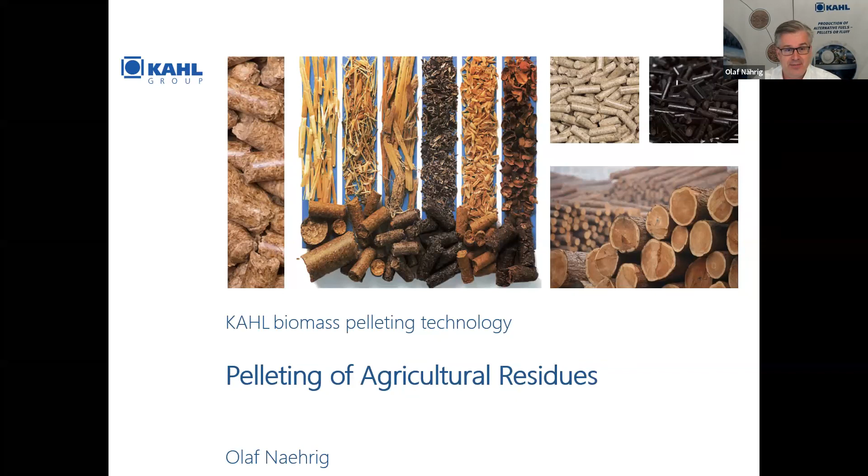For example, here in Europe, the straws from wheat or corn, maize straw, and other straws, even grasses. And when we go further, we can also see that for many decades, beet pulp, for example, has been pelletized. But this is now more an animal feed topic. Let's talk about pelleting of agricultural residues more on the energy sector.

You may know Amandus Kahl is an independent family-owned company. We call ourselves still a medium-sized company. We have more than 900 employees worldwide. And we are also a member here in the World Bioenergy Association, and a very proud member. We appreciate all the work of this association, especially as it brings the topics that we have as a supplier together with the other parties in the industry on the table.

It's very interesting. Amandus Kahl is a company made in Germany, and it's everything from a single source. We can build complete plants, with engineering, manufacturing of equipment here in our facilities in Germany. Then we have erection, assembly supervision, startup and commissioning, and also after-sales service, all done with our own people from Reinbek in Germany.

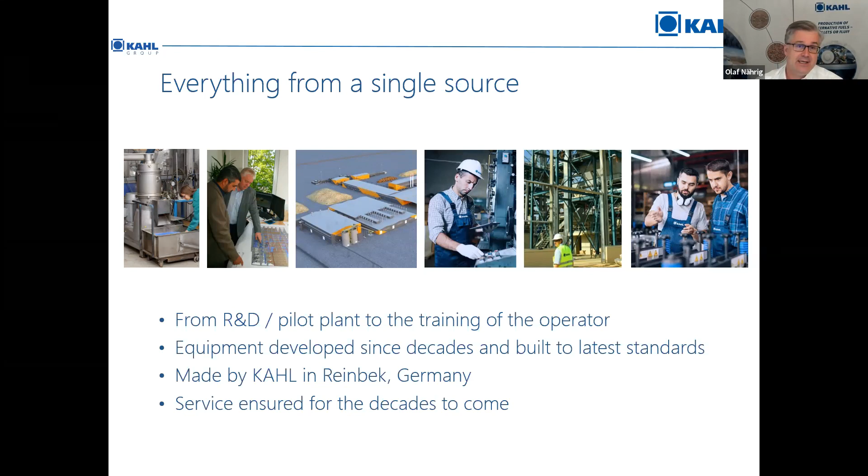You may know that we are basically the sole maker of real industrial flat die pellet mills. Our industry flagship today in the biomass industry is our 65-1500 with 630 kW. On wood and other biomass, it already has a basic capacity of 10 to 12 tons per hour. And today we also see more and more people adding steam, which makes this pellet mill even more efficient, with capacity up to 15 tons.

For example, this is done in North American wood pellet plants where we have a lot of large-scale installations now, where people achieve 15 tons with a single pellet mill, applying only 630 kW — a very energy-efficient machine. Nevertheless, at this efficiency, it still provides the highest PDI and bulk densities, to supply pellets according to industry standards. And it has the lowest energy consumption and operating costs of all pellet mills in the industry today, when it comes to roller lifetime, bearing lifetime, grease consumption, energy consumption, and downtimes — in the end, available operating hours — it's a very feasible pellet press.

And these advantages we can see clearly in the rising market share of this pellet mill in the global pelleting markets.

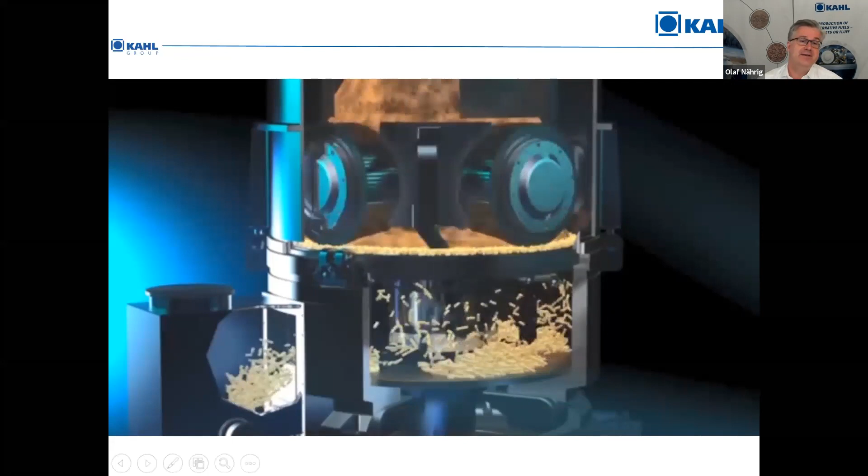Now, how does the flat die pellet mill work? The material comes from the top and falls into the large press chamber where the rollers are rotating on the die plate — a multi-roller system — and these rollers press the material through the die plate and shape the pellets. Roller numbers are typically 3 to 6; in the big machines we have 6 rollers, which are large and have large roller bearings inside. This is important for the long lifetime of the roller bearings and very low grease consumption. The big press chamber provides sufficient space for the material to fall in, be distributed, and be pelletized, which is very important for the low bulk density fiber we usually have in agricultural residue.

So now comparing wood and agriculture residues, I selected these two photos here, logs and chips, and we can see that it looks like a very regular product. The logs are nice and neatly stored here, and the wood chips also have a good shape.

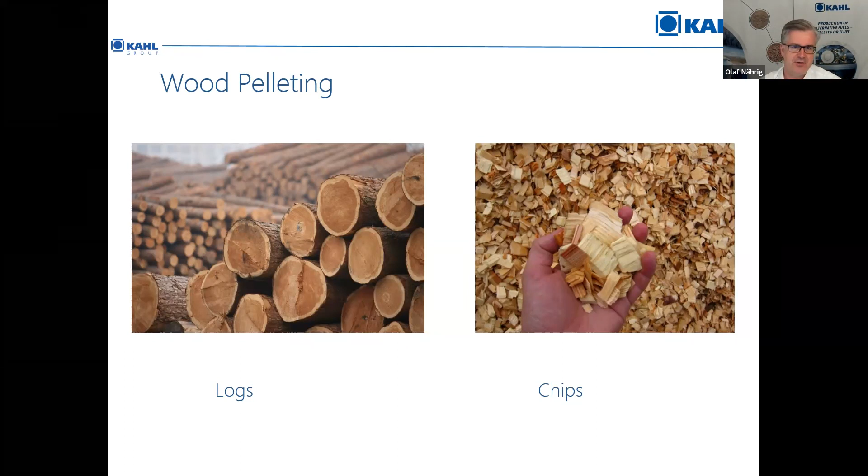So it can be also sawdust in the wood pelleting, because many wood pellet plants are attached to a sawmill. But these are monoproducts typically in large amounts. So a wood pelleting plant has different requirements when it comes to, for example, the intake section, and this has to be considered when we now have an agriculture residue pelleting plant, where the raw material looks different.

So, but what do we have? Mr. Rakosh mentioned already earlier, no? We also have high ash contents in these agriculture residues, so we have to do something against wear and tear to have long, stable production runs with the pellet mills. We have high contents of undesired minerals and chemicals, which is not desired by somebody who wants to burn it. So typically we have lower calorific values.

Then we have to consider seasonal availabilities. When you have bagasse or other plants or straws, they come in a certain season of the year. Then we have to see what to do with the storage of this material in the meantime, and to prevent some fermentation processes. Typically, these are challenging raw material properties.

We have to question the homogeneity of the material. Compared to sawdust, one can assume that, for example, agricultural residues don't have this homogeneity. They may differ. Then, as I mentioned, fermentation processes can occur while wet, something starts to rot maybe. And in agricultural residue, also contamination during the collection process with soil, sand, whatever, can go into this material, and this has to be considered. And then we have the low bulk densities and usually also more poor flow abilities.

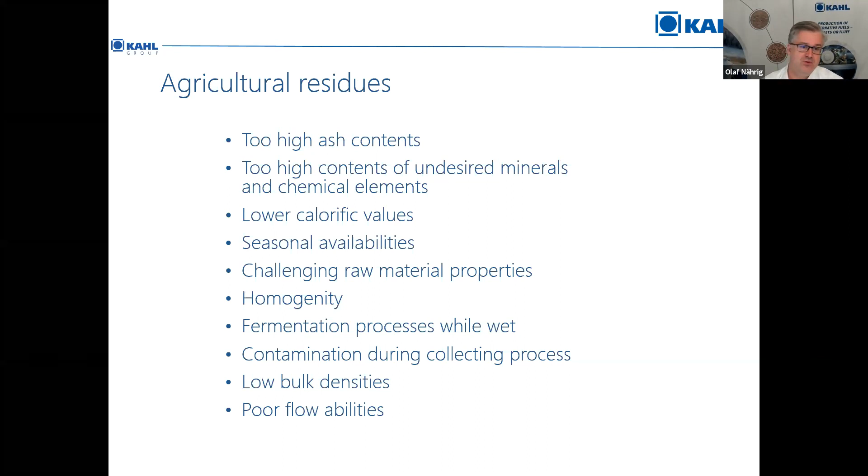So as mentioned, my background is Asia Pacific. That has brought me to many biomasses to be pelletized, which are maybe for Europeans a little bit odd, but in Asia Pacific very common.

Oil palm fronds, we started already in the 1990s. Each year, the lowest row of branches is cut, and then something can be done. One thing is really to pelletize it and make it as a fuel or as an animal feed.

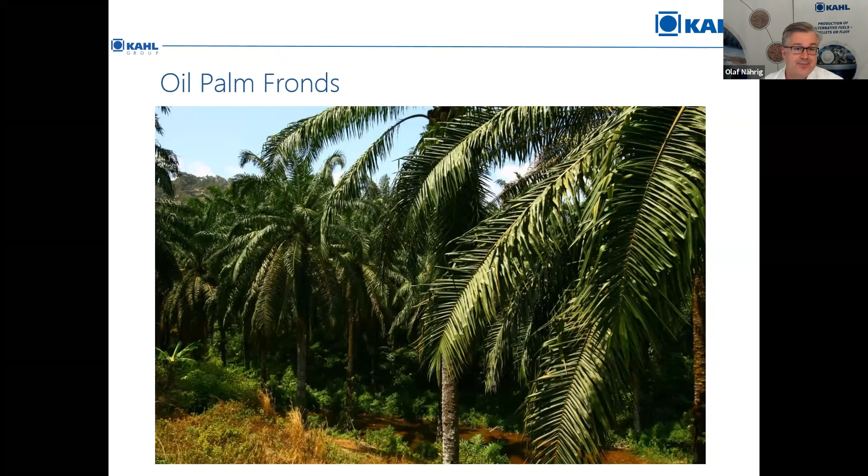Or empty fruit bunches from oil palm. Each oil mill has this kind of dump where they put the empty fruit bunches and store them. So here they still look somehow neat, but when you get closer, you will see it's a very fibrous material with different characteristics in each bunch. So we have loose fiber ends and we have a tough pinnacle in the center. That's what we have to consider when we process this.

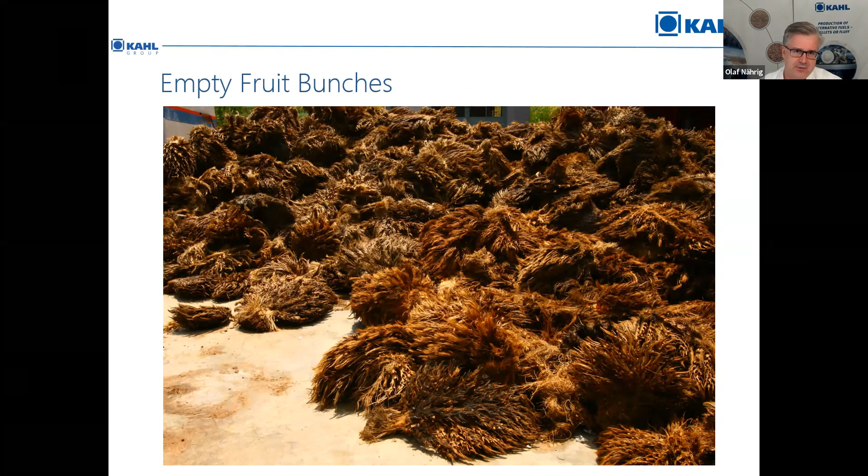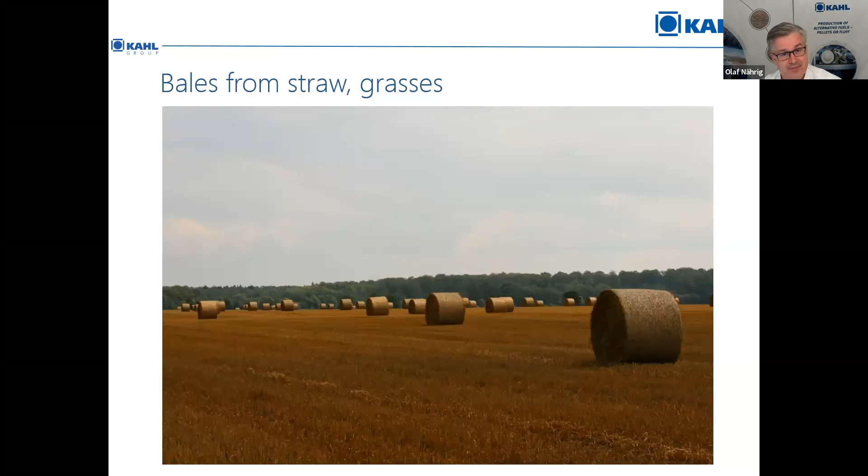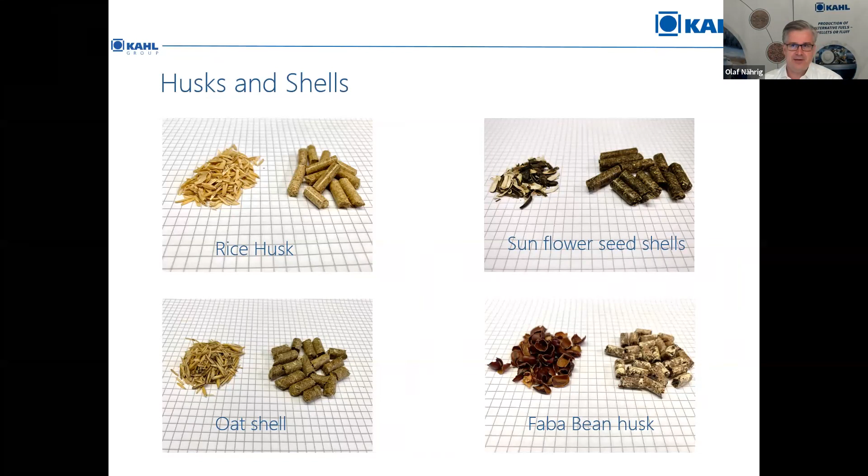And then we have the husk and shell fractions. We have rice husk, sunflower seed shells, oat shells, faba bean husk, could be all these kinds here. And when we have these as a raw material, they are already good, usually dry, which is very good, one can save money. Then one has to consider maybe a grinding step, and then it can be pelletized. And I can tell you these materials that you can see here, with a Kahl flat die pellet mill, you can pelletize directly without any grinding step before pelleting.

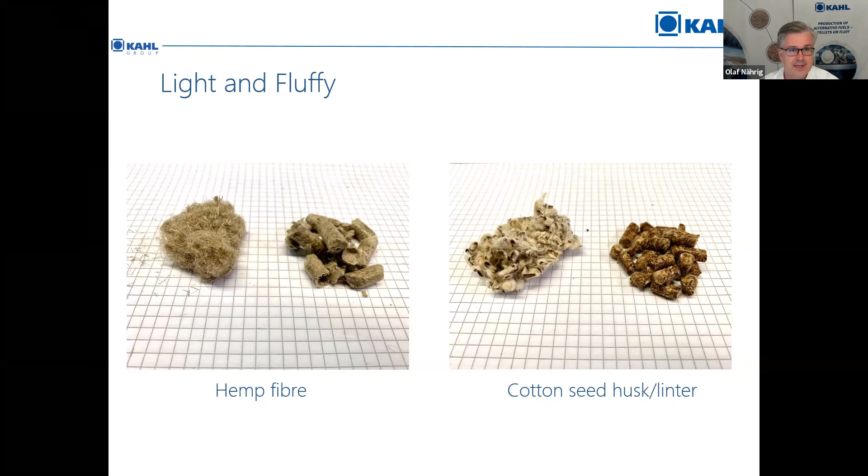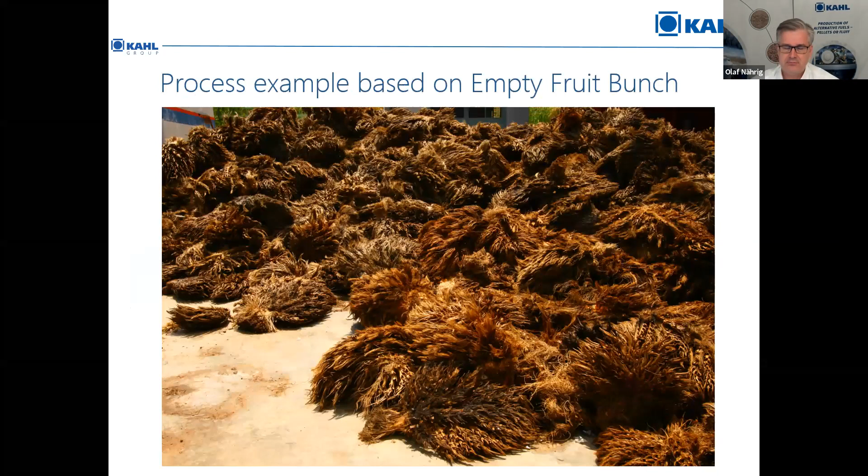I'd like to give you now an example on the processing of empty fruit bunches, how this can be done. This concept is one we already use in Malaysia and several plants.

So for the empty fruit bunches, there's a wet shredding process before, and these long wet fibers can go into the pan grinder mill, and then we make fluffy pellets.

These fluffy pellets you can bring to the belt dryer, where we can have a very homogeneous distribution on the dryer belt, and achieve a very homogeneous drying result, which is essential for the pelleting process. We have to consider always particle size, moisture, and homogeneity of these characteristics. Homogeneous moisture content is very essential for a good pelleting result.

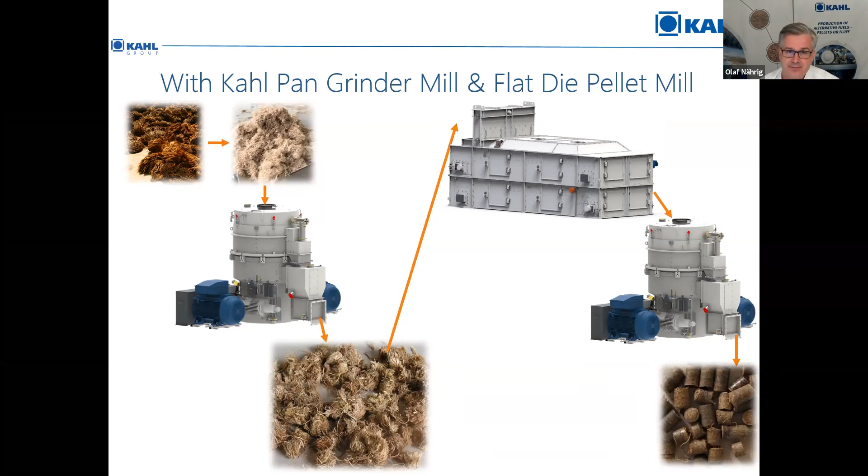Okay, summary for us here, pelleting of agricultural residues. It's a very interesting alternative fuel raw material. We know that people more and more look into these raw materials because they are cheaper. They are really also available as a fuel, and they want to do something. But we need to do an adapted process according to the raw material characteristic.

We have an adapted size reduction process. You saw the different characteristics the raw material can have. This we need to consider in a plant. We have to apply wear measures against high ash content and consider the large volume flows to be handled. And these large volume flows also need to be processed in any machine in the process.

So, and here, of course, the large scale pellet mill such as the Kahl 65-1500 and other models, they have the space to handle these materials at high capacities very well.

We have to look into the consideration of low operating expenses. That means long production runs, long lifetime of the parts used, for dies, rollers, and bearings. Low energy consumption and grease consumption, because it's an agricultural residue, so the value is not the highest. So we have to look very, very well into the feasibility of the overall process.

And what we also see now is optional value adding by washing processes, steam explosion processes, where we also supply equipment. And of course, I think everybody already knows the torrefaction processes to increase the value adding before doing the next step of pelletizing.

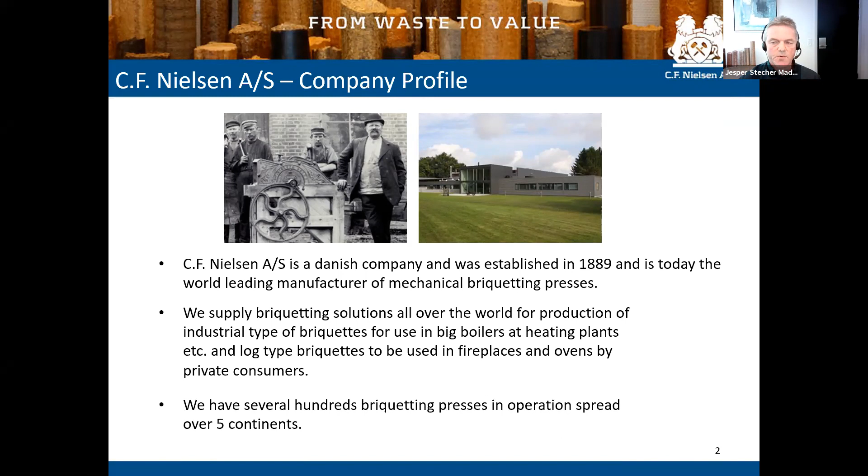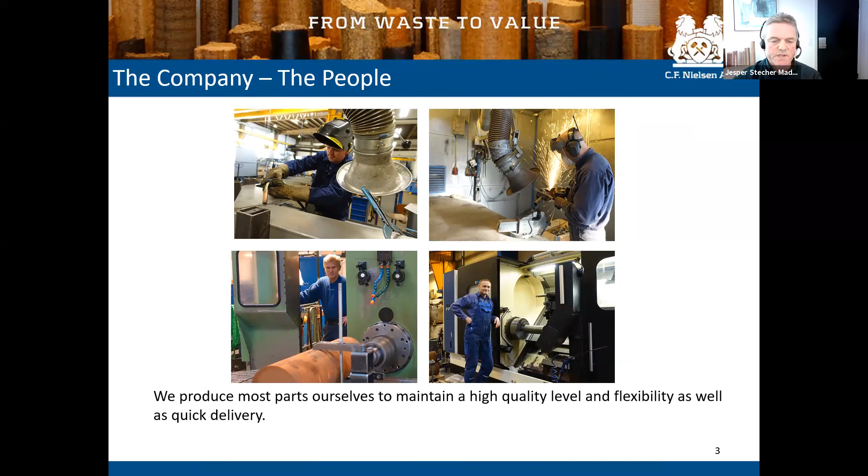We produce the most part ourselves, mainly to maintain a high quality level and also to be flexible, to be able to change things rapidly, and also to have a rather high level of quick delivery. So that's one of our key points, that the vital processes we keep in-house to be able to control them.

Another line is the Shimada, which is an extruder press, a little bit less capacity, up to 600 kilo per hour, and also makes this special briquette size and shape, I think you might know as the Shimada briquette. Very high density briquette, and very good for, for instance, pizza.

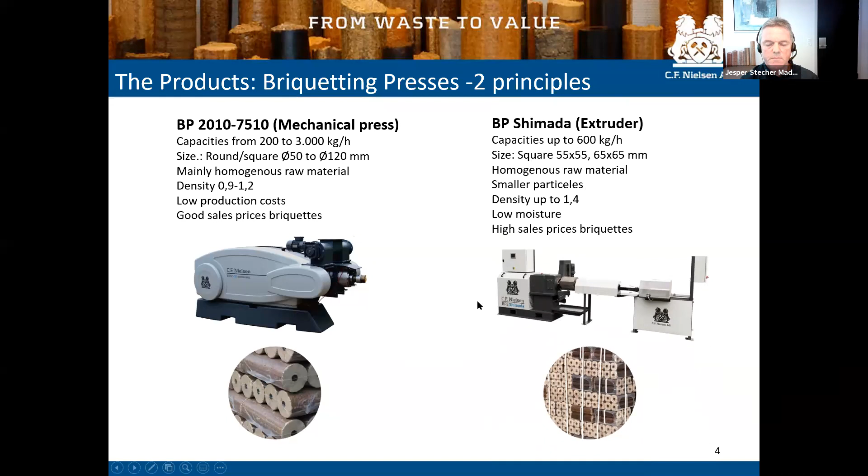If you take the main product, which is our mechanical press, the construction is equal to the construction of an eccentric press. A constantly rotating eccentric is connected to a piston, and that compresses the raw material into a conical die and makes the briquette. We have sizes from smaller ones from 150 up to 3,000 kilo per hour, and in various types of shapes and diameters.

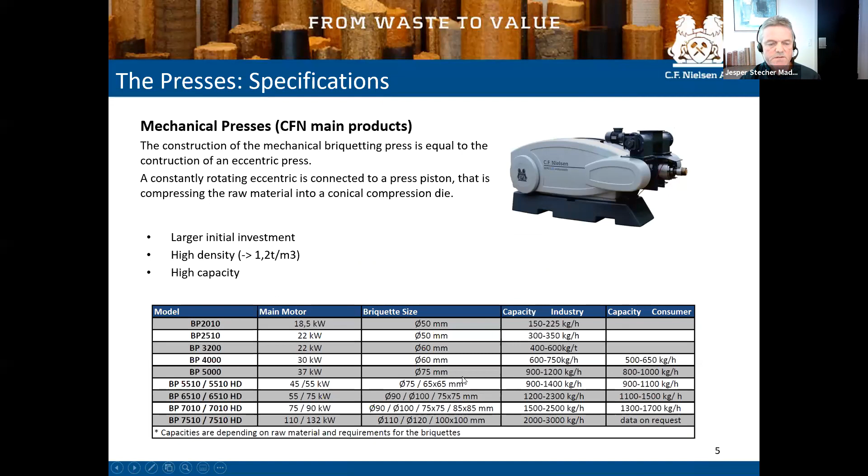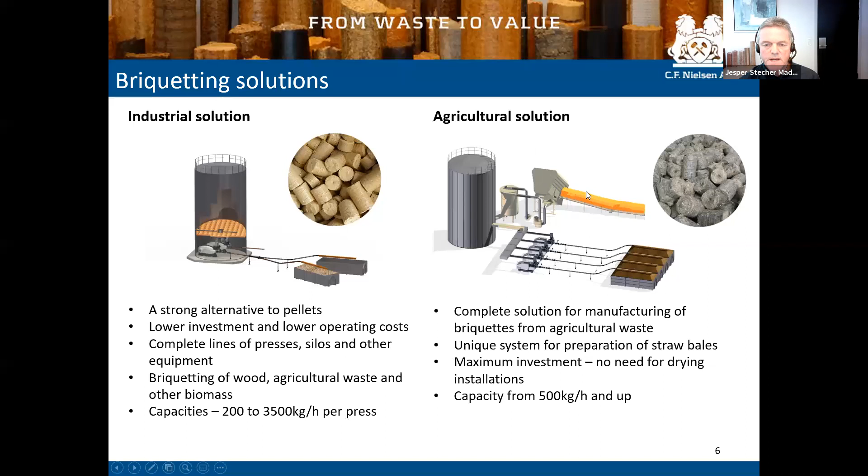We have the agriculture solution where we can make a complete solution for briquetting not any, but almost any agricultural waste, and have a capacity from about 500 kilo and up. And we have a straw baling system where we can handle straw coming into the system in bales.

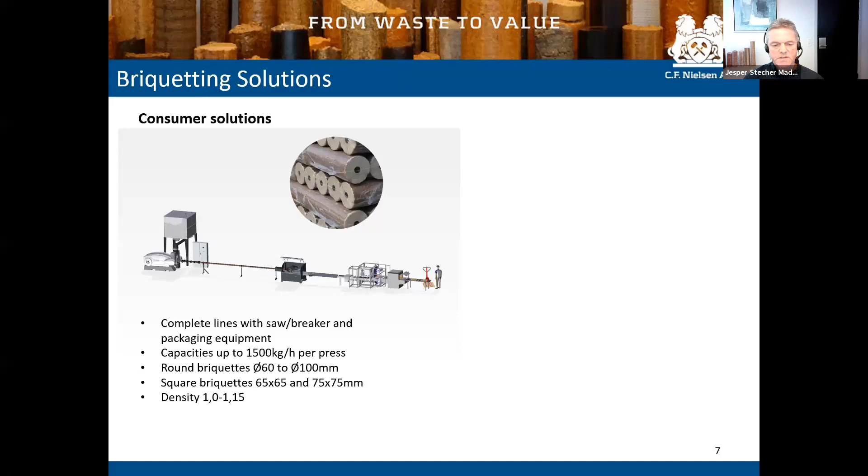Consumer solutions, which is a complete line with saw, breaker, and packaging equipment. And in the end, we could have also an automatic robot packing line. So in fact, you're going to have a pallet of 1 ton of briquettes coming out ready to ship to customers. Capacity for consumer is around 1,500 kilo per press. And again, briquettes from 60 millimeter up to 100.

We can also make a complete line making Shimada briquettes, which is, well, a little bit out of our normal league. Normally the main press we supply is the mechanical press.

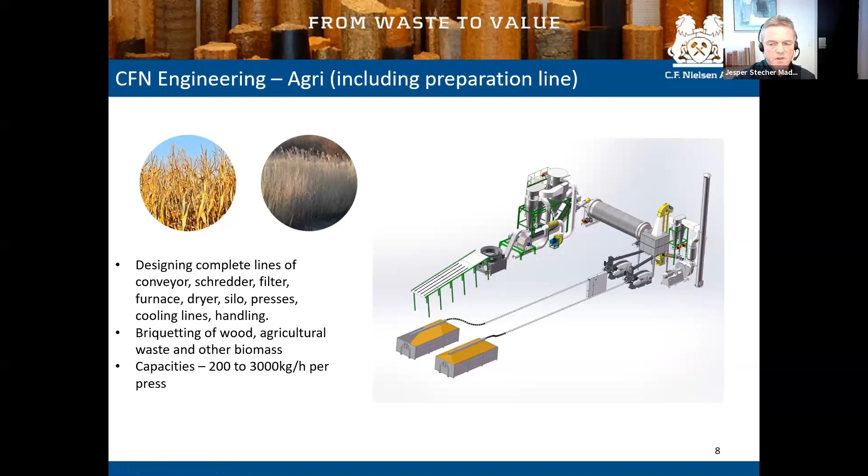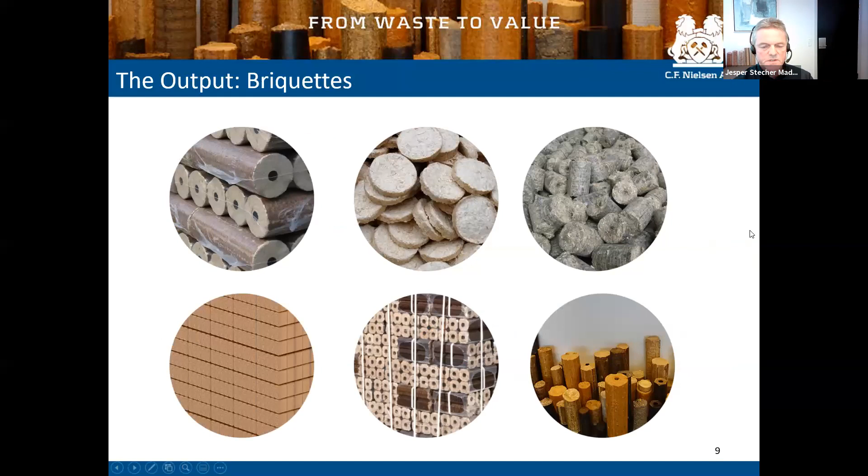We also have a division that can do total engineering, meaning that we can make complete lines of conveyor, shredder, filter, furnace, silo and presses, and then out to the end user, in this case in containers, and can briquette wood, agricultural waste, or other biomass. The output that we produce is then briquettes in different shapes, different forms, diameters. So the variation is pretty big. Sometimes it's customer specified how they would like the briquette to look.

If you come to raw material, agri, we have different types. We have peanut shells, corn stalks, rice husk, coffee husk, a lot of straw, napier grass, and miscanthus. And as the previous speaker talked about, bagasse, cotton stalks, and a lot more. We are able to more or less compress everything.

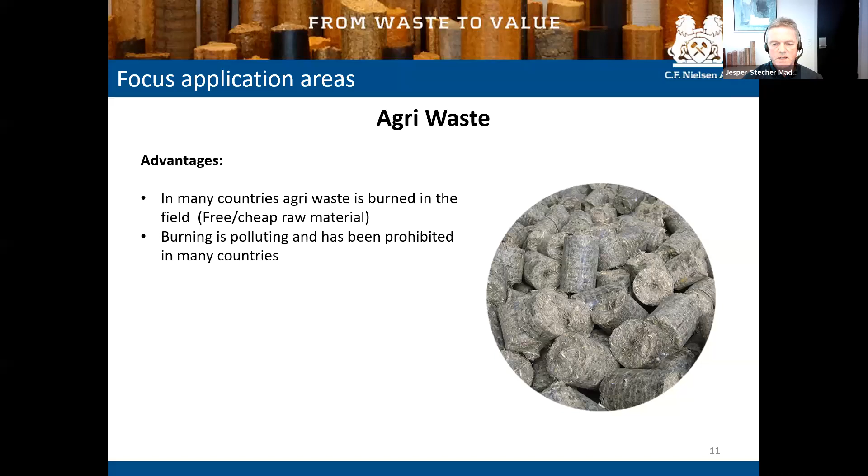The advantage of the focus area we have is on the agri waste, which in many countries is burnt in the field, which means it's going to be free, almost free, or very cheap raw material to be processed afterwards. Burning is polluting and has been prohibited in many countries, and that's why it's also going to be an aspect in the future we have to take into consideration.

Forests are being depleted, and agri waste can be turned into fuel, which is, I think, the next step in getting our CO2 step ahead, which we all are working for right now. Government incentives are available, and that would also push this in the right direction, and also to be able to supply these briquettes while getting incentives from the government.

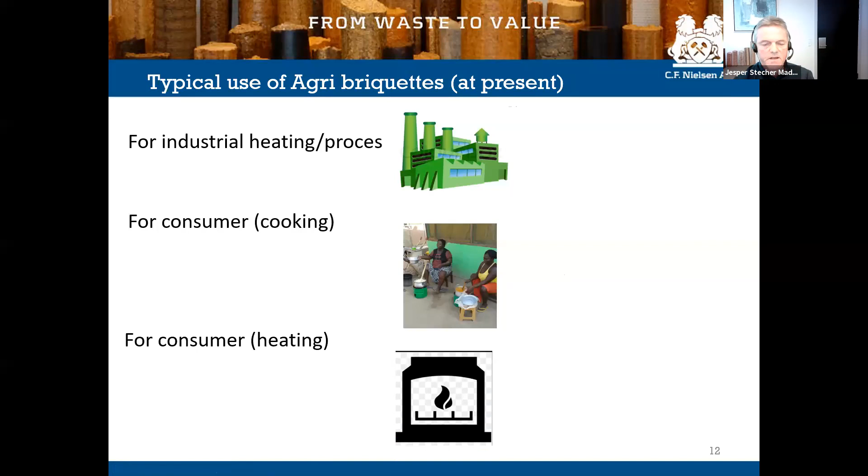What is then the typical use of agri briquettes at present? We use briquettes for heating, the process industry. Use it for consumer, for cooking. We have made several installations and several projects in Africa where they use briquettes to heat up these small stoves instead of going out and cutting some wood down. And then for consumer, the consumer heating area is also rather big.

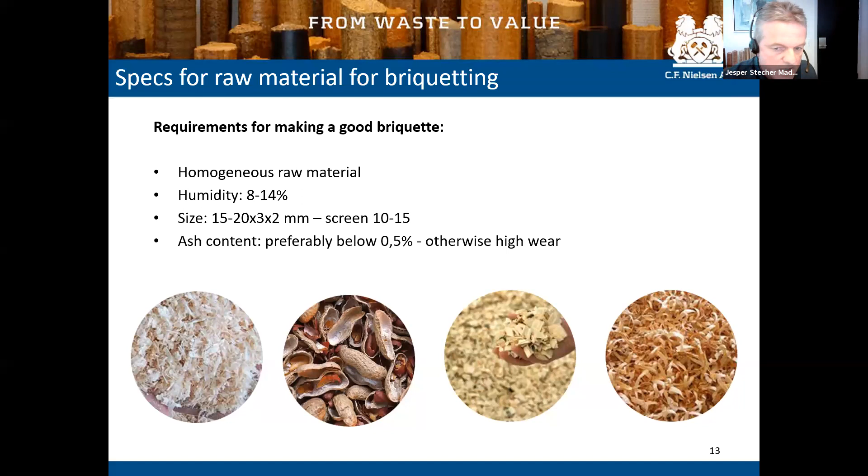But that's going to be, as Olaf said earlier, very difficult to get, because we are in this agriculture business, and more or less all of these products have a lot of ash. And that will lead to high wear on the system.

What are then the differences as we see it when we talk about agro versus wood? We have a larger volume to be densified, density typically below 100 kilo per cubic. So we have modified our inlet system to be able to cope with a larger volume in the press. The structure of agro materials requires a different die system to be able to make a solid briquette. That's why we have made a longer die system specific to have higher counter pressure in the press line and then make really solid and stable briquettes.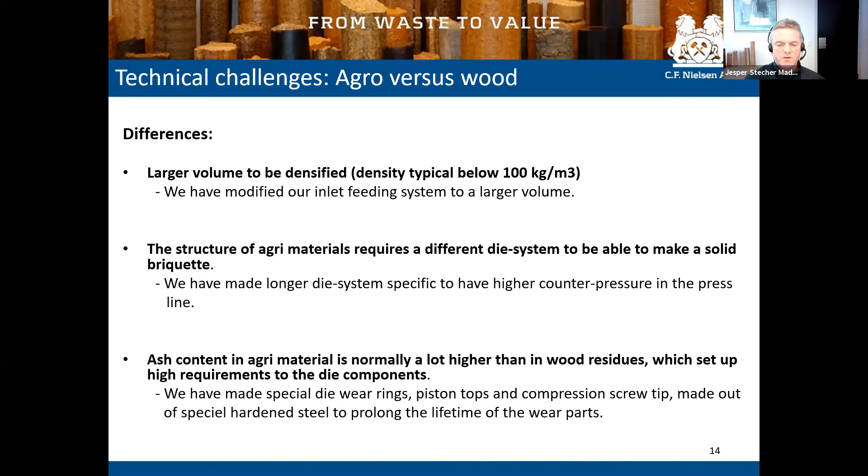And then we have the ash content in agro, which is normally a lot higher than in wood residues, which sets up high requirements to the die components. Because of that, we have made special die wear rings, piston tops, and compression screw tips made out of special hardened steel to prolong the lifetime of the wear parts, which is very important to get an operation running and also running at a reasonable cost.

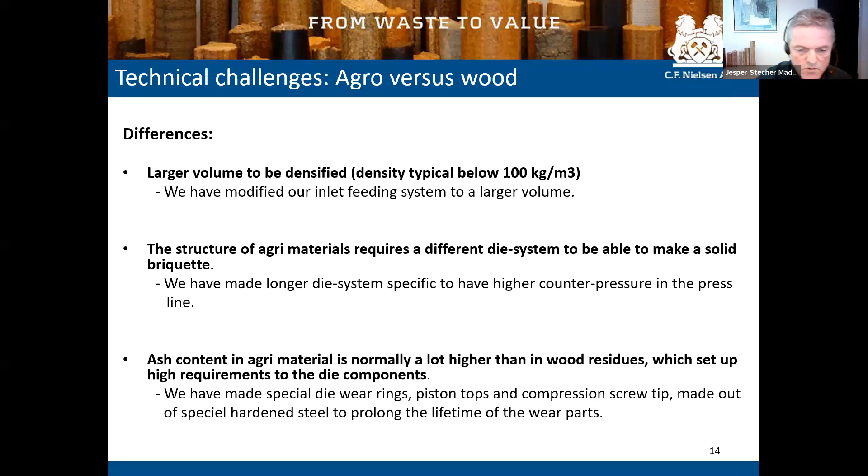Where do we then see the new market for agro waste products? We have a different sector of our company called Kinetic Biofuel involved in supplying briquettes into biogas plants. The picture you see on the left here is from an installation we have in UK. And the principle about this is that we handle straw from bales to briquette for industrial scale production based on straw and slurry. And what happens is that when we briquette straw, we make some small steam explosions, which change the structure of the straw, which will enable it to absorb more than 7 times more than normal straw. And that, of course, in the biogas plant, is very important, that the straw is able to absorb as much liquid as possible.

And secondly, of course, the briquettes give a logistical advantage when you go from loose straw down to solid briquettes. If you put straw briquettes into a biogas plant, you are able to double your biogas production with a yield of 300 liters of methane per ton VS, corresponding to approximately 250 liters of methane per ton straw. And that's a very important issue when we talk about getting a biogas plant to operate in a reasonable way and giving a good output.

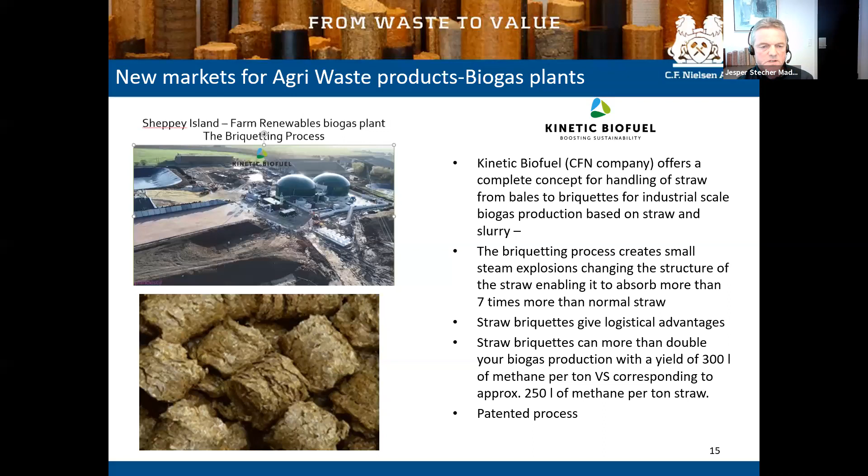Another, which might be something that we see coming in the future, is the briquetting of wine stalks, going to consumer or industrial use. If you take a vineyard like this one, we have approximately 1 to 1.2 kilo wine stalks per year cut out of each of these wine plants. That equals about 3 tons per hectare. And if you consider the total area worldwide of vineyards, the amount is very, very large. And you're not anymore allowed to burn this on the field, which they have done for many, many years. Now they have to collect it, which you can see in the center, and then they have to do something with it, which could be to shred it and to make briquettes, and then use it for industrial, or also use it for consumers. Especially in South Europe, we see this as a huge potential.

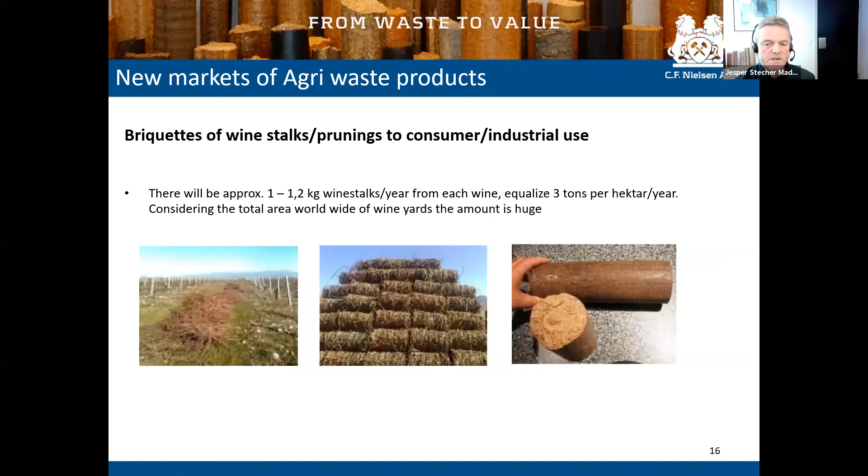So bagasse in Africa anyway is a huge potential for us to work with, and to set up the correct plant is another issue, which is in Africa in general a little bit problematic. Financially, it's not easy to raise capital, and also to work in these areas could be, to some extent anyway, problematic.

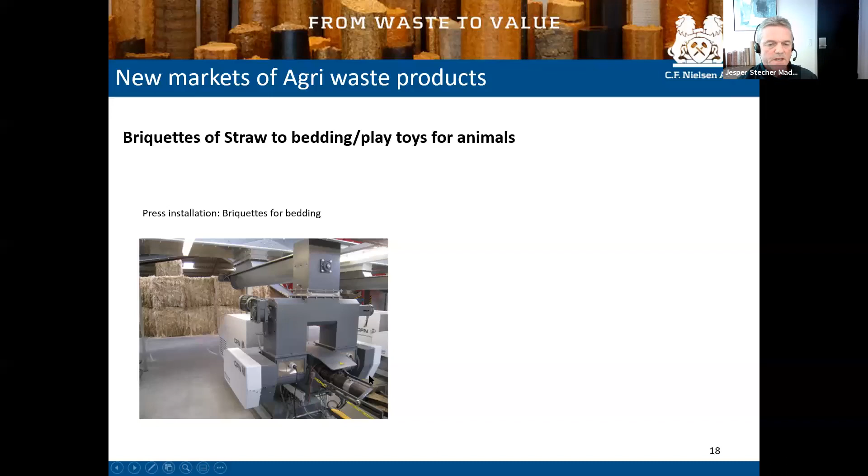Then I just took a couple of other markets for agri waste which are not into heating or energy. The first one is briquettes for bedding. You see the bales here, and we briquette it into briquettes that could be used for bedding for animals, for pigs or for cows or for horses.

Another maybe strange use of briquettes is for pigs, where they compress raw material and use it in this holder, and the pigs can go and eat it. You can add different types of minerals or whatever you like to this briquette. So at the same time as they eat it, the pigs also get small pieces they can play with, which is in fact a regulation now coming in Europe, that you need to amuse the pigs so they don't attack each other.

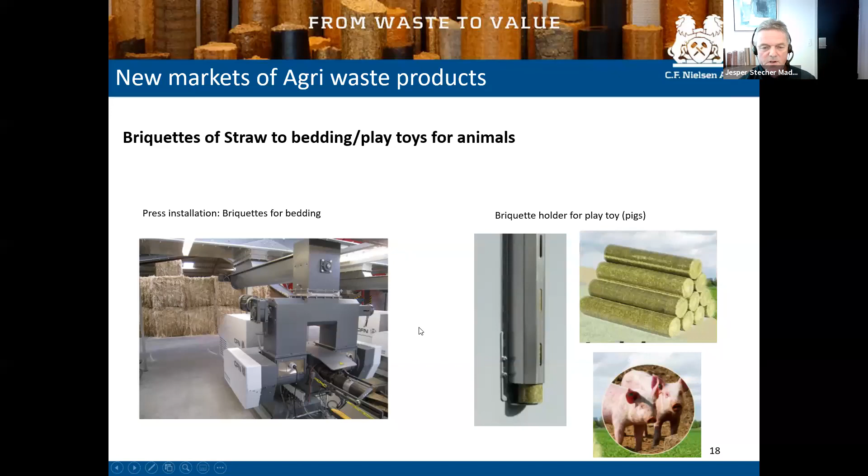The gasification area also seems to be moving rather quickly. We're not into a lot of projects like this so far, but the future looks promising, and we think that's going to be something we have to look into also in the future.

As the other speaker mentioned, to be able to make some kind of OPEX calculation of whether it makes sense to invest in a briquetting plant or not, it's very much depending on the raw material, the local cost of raw material, the sizes, the working cost, the electrical cost. So there's a lot of parameters that makes it very difficult to come up with some kind of rule of thumb for the cost of implementing a factory in a given region.

Okay, that was my short presentation. If you look at our website, you can see several videos of customer installations and a lot of information about C.F. Nielsen in general. So thank you for listening, and I hope you have some questions which I might be able to answer.

Thank you very much, that was extremely interesting, Jesper, and quite impressive how long your company has already been engaged in producing these presses. I would like to ask you a question of orientation.

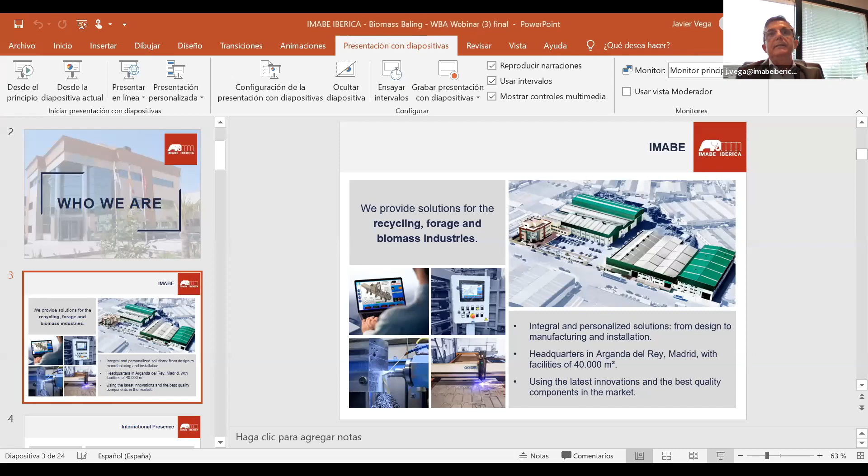I will start presenting briefly our company. We are a Spanish company based in Madrid, and we provide baling solutions for different industries: biomass, recycling, waste, and even metals.

We have our own factory in Madrid, as you can see, using all kinds of technologies. We manufacture the balers by ourselves, cutting, designing, installing all elements of our balers, and we try to use the best technology, the best innovations, the best hydraulics. We are selling quality, you know.

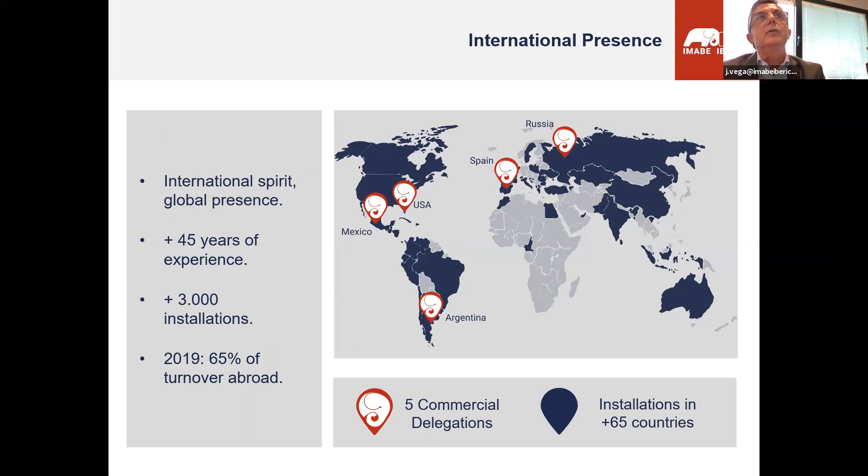We are very international, with more than 3,000 installations around the world, especially in third countries like Russia, Kazakhstan, Mexico, South America, even Indonesia, and other countries, with our own offices in USA, Mexico, Argentina, and so on. We export more than 65% of our machinery.

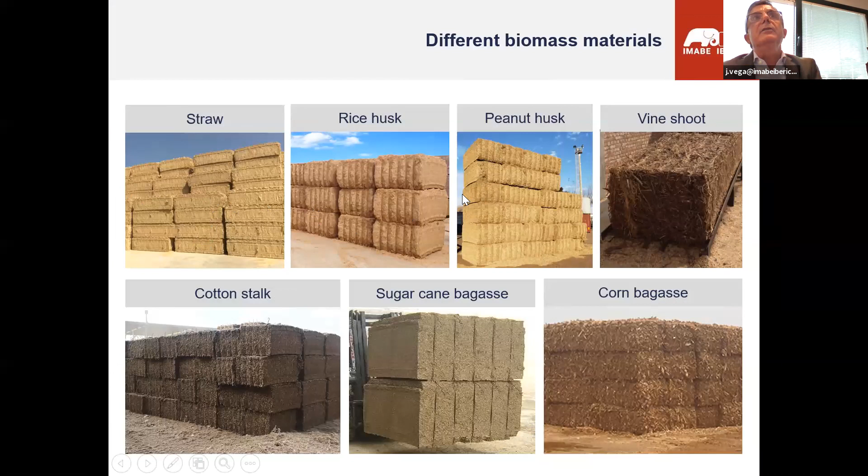We have all types of solutions for biomass and agriculture products in general. We have experience in baling straw, rice husk, peanut husk, vine, cotton stalks, sugarcane, and so on.

Regarding baling, for big amounts it is important in our technology to have in mind the tying system. Historically we were using wire as a tying system, but the new requirements, and I am sure this will be critical in the future for biomass, call for PP twine, which is polypropylene. We have the new tying system for this type of system, for this type of products.

Also, we can bale not only for biomass, but for animal feeding, using sleeves or even strapping.

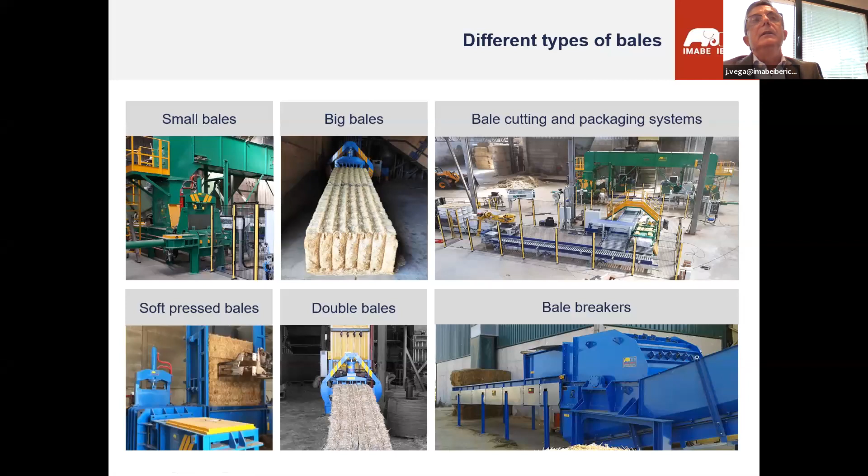We have a huge range of different products for balers, small bales, big bales, even complete plants, even with robots to handle the bales, okay? And different solutions, even bale breakers.

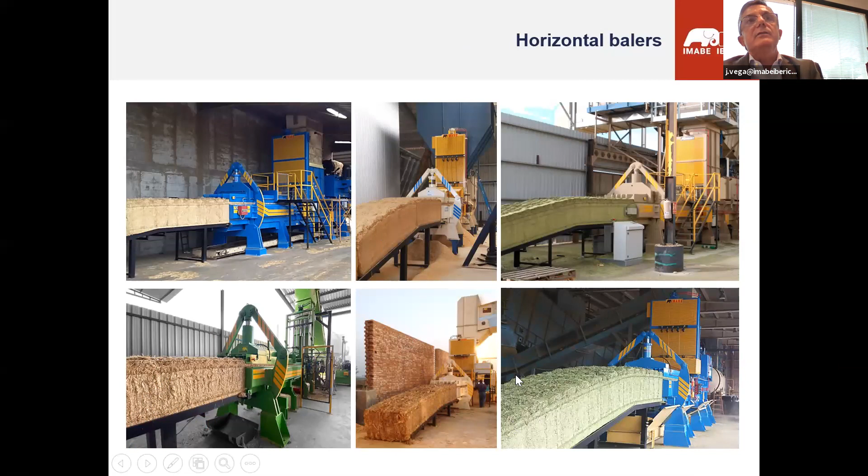As you can see, we have a lot of different installations for alfalfa, wheat straw, corn stalks, and so on. Not only stationary solutions - as somebody mentioned before, sometimes mobile solutions are used.

For example, you can see one for rice husk. In fact, it's a stationary baler installed on a platform that you can move, you know. For example, these two balers are installed in Pakistan in a biomass factory for agricultural residues.

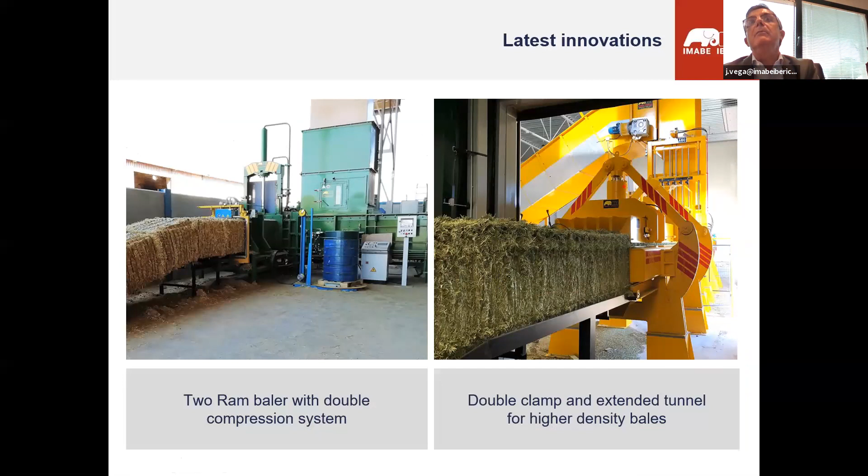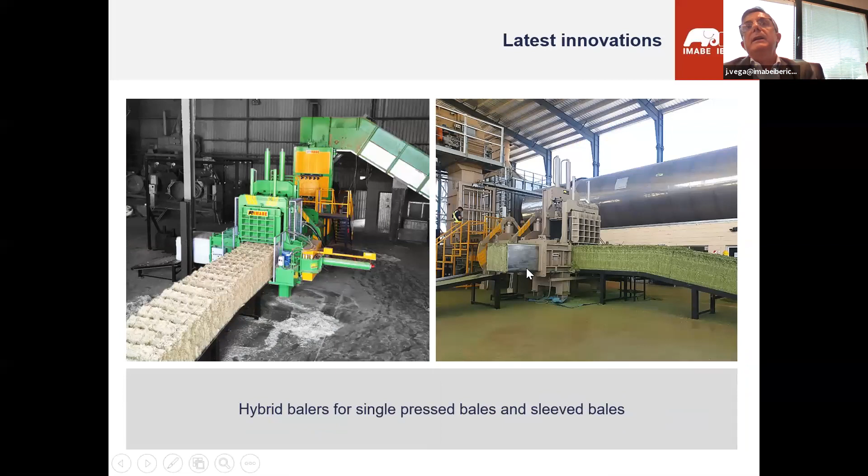A lot of different systems depending on the product, depending on the moisture. It's very complicated, as my colleagues told us before.

I will try to briefly explain one of our most interesting business cases. For example, we sold 3 balers to Stora Enso and Packages, one of the biggest Pakistani companies. This company is a paper mill, producing cardboard. In Pakistan they have electricity shortages.

With these agricultural residues, they burn the material and produce electricity for their factory. You can see how the product comes from the field, how it's baled, even baling on the field. The key factor for us and for everybody today is to take advantage of logistics to reduce transportation cost. This is our specialty.

It's proven machinery, very hard, long life. We're introducing technology but with simplicity, because maintenance should be very easy, not a lot of spare parts. We take care of all details because we prefer that our customers have a lot of profit, a good yield with our machinery. It's the total cost of ownership of our machinery, and we consider this one of the best relationships.

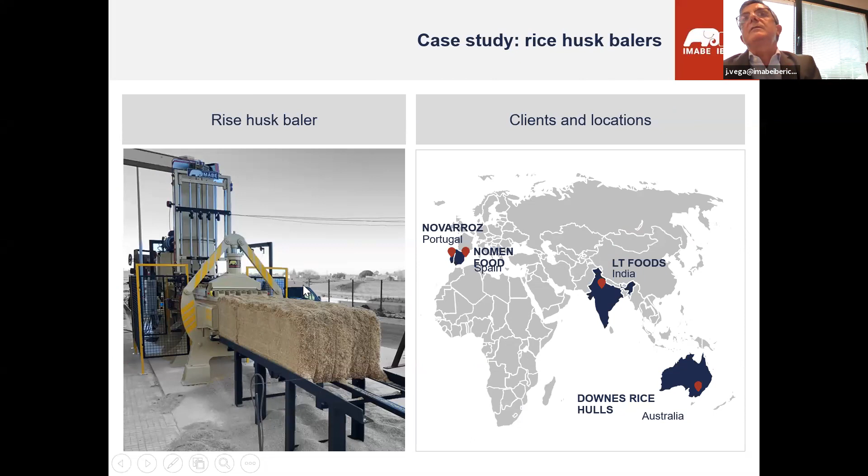We have other examples. For rice husk, we have installations in India, Portugal, Spain, Australia, and Argentina. We have huge experience baling this product, which is not easy to bale, even with mobile solutions. Peanut husk baler, you have here one example.

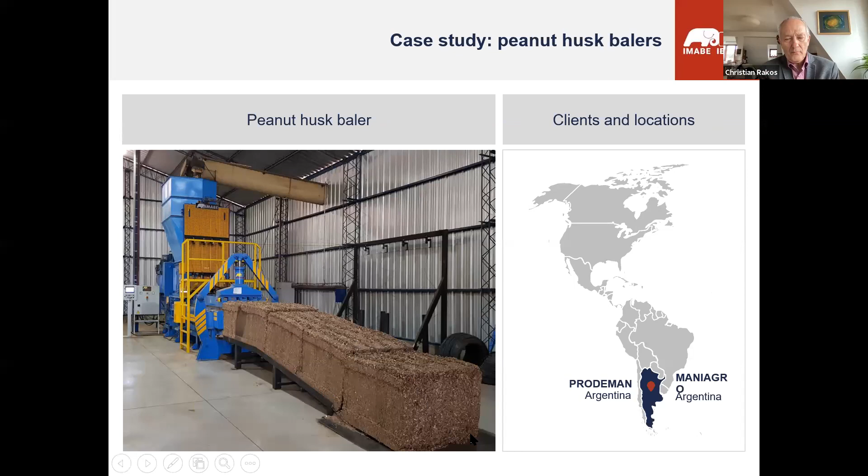In this case, it's a big company, one of the biggest companies producing peanuts in Argentina. They purchased 2 balers and have their own biomass plant. They store these bales and then produce energy.

Alfalfa and hay, in this case we're talking about animal feeding. USA is the biggest exporter, but Spain is the second exporter in the world. Now a lot of alfalfa is exported to Arab countries, China, and other countries. It's a huge market and increasing.

We have special bales designed for alfalfa and wheat straw. Wheat straw could be used as biomass or even as animal feed for fiber. That's why we are learning every day about how to properly bale wheat straw.

We are striving a lot with wheat straw, but consider also alfalfa, where there are several cuts in the season. The moisture and density entering our balers is not the same depending on the cutting, the hour you are cutting in the field, and the process.

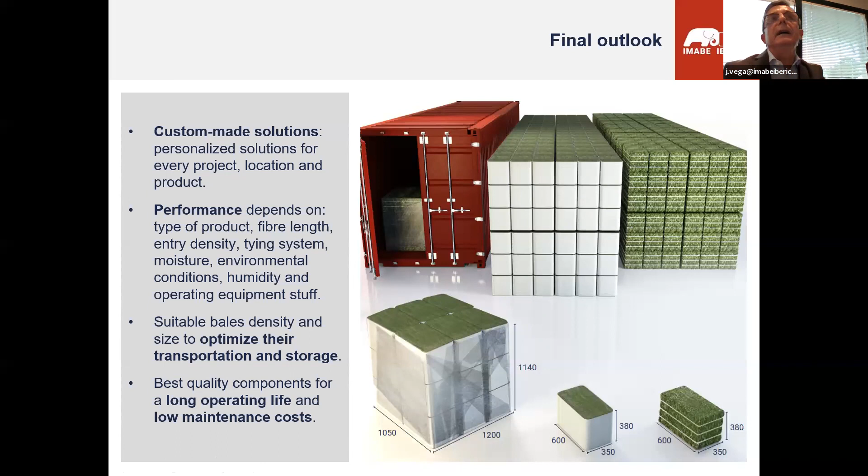And it still continues the process. Mr. Christian Rakos asked me about some figures. For example, we have a model for rice husk. We have this model installed for the last 20 or 25 years in several countries, in several continents.

This baler is not so big. It is able to produce from 7 to 9 tons per hour of rice husk. What is the issue about rice husk? It is very difficult to have this bale stable. You need several technicalities to achieve, to bale properly this material.

For example, talking about wheat straw, this is a good example. Now we have a baler, in this case H300, comparing with electricity power, it's 300 horsepower. This baler, with wheat straw, is able to produce from 15 up to 20 tons per hour. But pay attention about the length fiber. Let me give you one example.

We sold one machine to one customer where the length fiber was this size. Officially, he was chopping, and supposedly the length fiber was 10 centimeters. But in fact, the grinder was not chopping, only giving one cut. The performance with 10 centimeters fiber in another baler is 8 tons per hour. But if you are not chopping the material, the performance is reduced by half. In this case, the performance was 4 tons per hour.

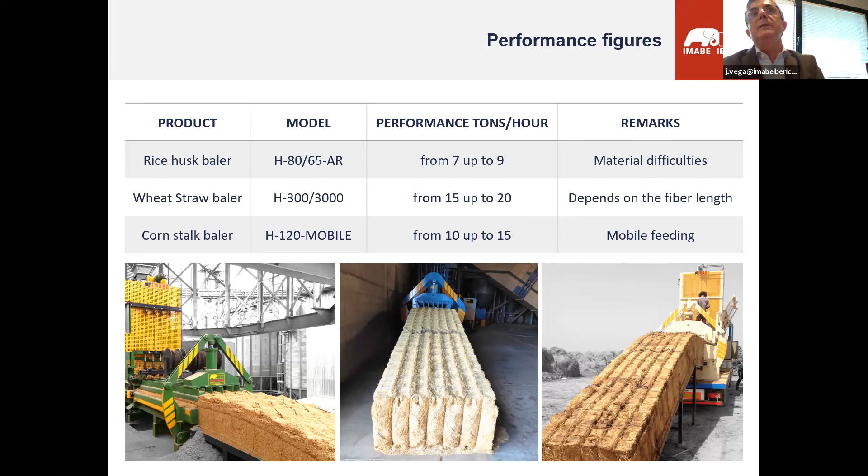It's like one example. Another figure I would like to share with you is the horsepower, the kilowatts capacity. For this rice husk baler, the energy consumption is approximately 35 kilowatts. Sorry, for wheat straw, it could be 4 multiplied by 55 kilowatts, and roughly running per hour is 185 kilowatts approximately.

And for corn stalks, in this case, we install a diesel motor, or even it could be feasible to install a diesel group if needed. I think with these figures you can more or less have some idea about how it's running.

In fact, we are trying to be a one-stop shop for biomass baling. We are very innovative, experienced, very international, and willing to cooperate with you. If somebody needs more details, please don't hesitate to contact us. And of course, you are welcome to visit us at our factory in Spain when this horrible COVID finishes. Thank you very much for your opportunity.

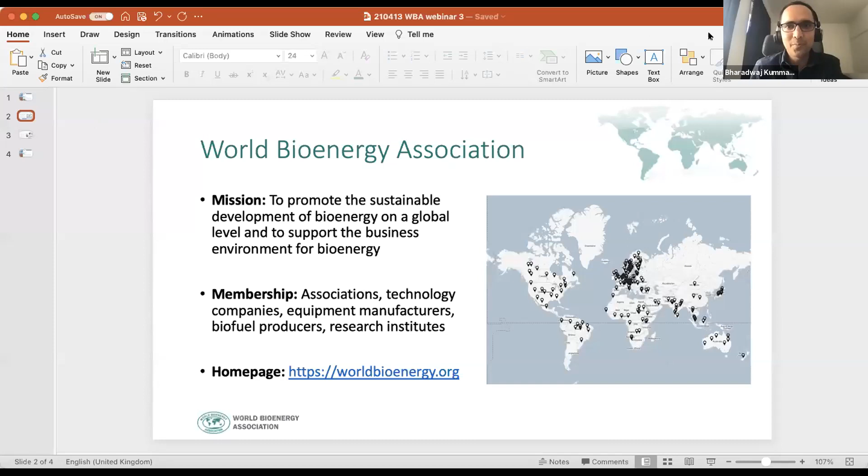Perfect. Thank you, Christian. I'll be very quick to ensure I don't eat into Peter's time for his presentation. I hope you can all see just a couple of slides. First of all, thanks to the speakers for joining us, and thanks to all the people who've joined this webinar. Briefly, as Christian pointed out, our mission is to promote the increasing utilization of sustainable bioenergy and also to support the business environment for bioenergy. This map shows where our membership comes from. As you can see, there's a big cluster in the European Union, but we have members from different parts of the world, and it's very interesting to know why some of them have not joined us, so it will be good to have wider representation as well. In terms of membership, we've got associations, technology companies, equipment manufacturers, producers of biofuels, research institutions, and so on, so we are a very wide network of bioenergy stakeholders. More information is available on our homepage.

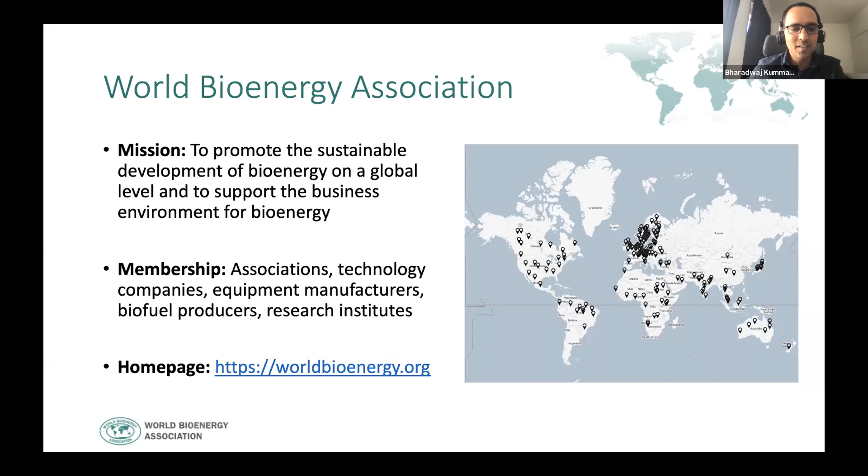And just speaking on the points which we had in the last poll on the reasons why anyone would be interested to join as a member. First, in terms of information, we are kind of a clearinghouse for anything related to bioenergy; by our publications of statistics, fact sheets, and mission reports, we give you the latest information on developments of bioenergy around the world.

The second is an opportunity to network, like what we are seeing right now in the webinar, in the chat function, in the discussions. In better situations, pre-COVID, we've been organizing study trips, workshops and conferences, but right now we're doing quite a few webinars, and these give an opportunity for members and bioenergy stakeholders to network.

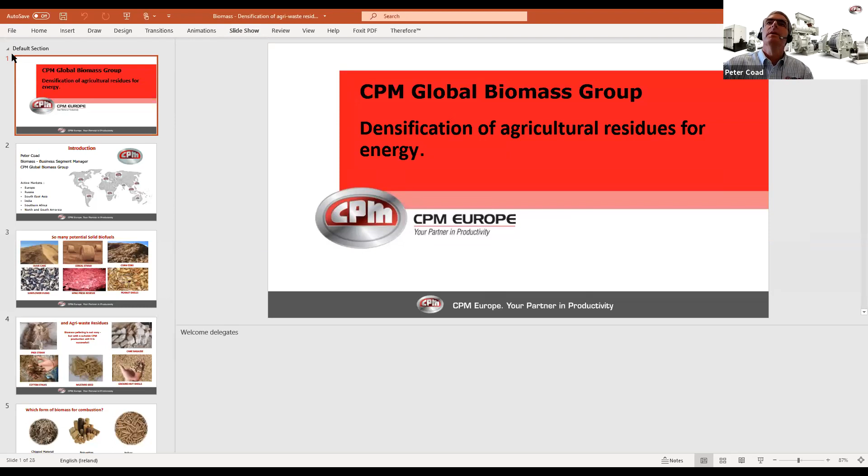Good afternoon, depending on which part of the world we're in, of course. It's very good to be invited today to join this forum, and I will endeavour to give you a run through on densification of agricultural residues for energy from the CPM perspective. My name is Peter Coad. I'm the Biomass Business Segment Manager for our biomass group worldwide. We have active markets in many countries throughout the world: Europe, Russia, Southeast Asia, India, Southern Africa, and North and South America.

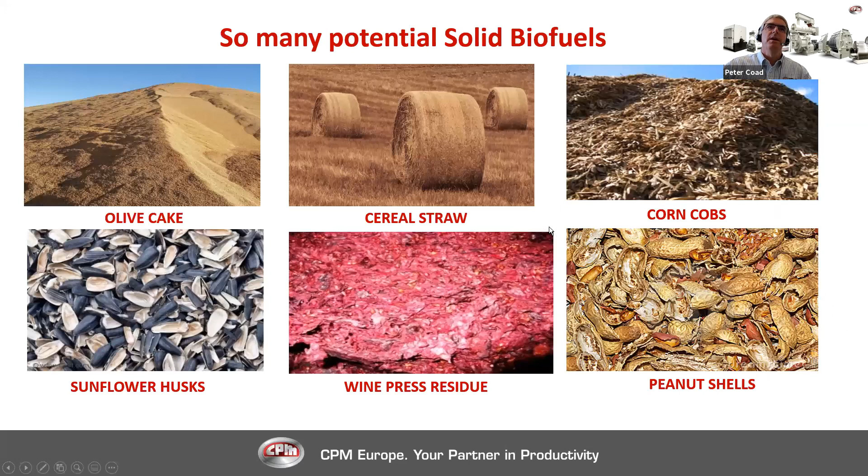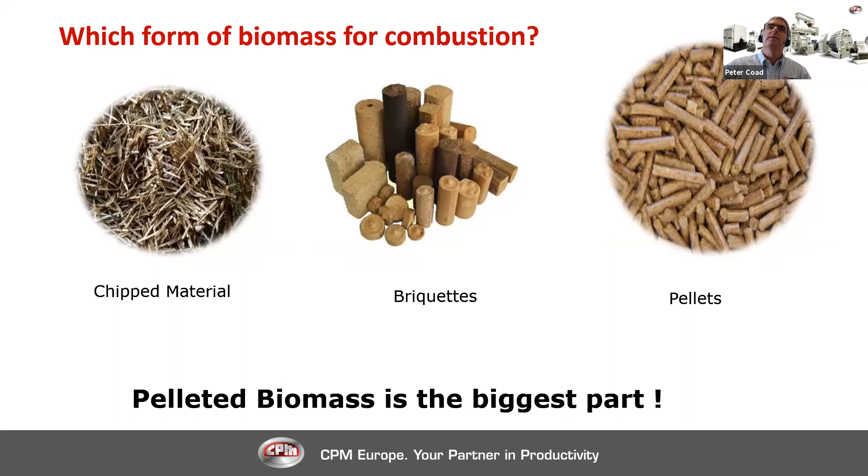So many solid biofuels and such potential. So many agri-wastes in different types and different forms. As everyone has said, solid biomass pelleting is not easy, but with a suitable CPM production unit, it can be successful. Which forms of biomass are burnt? You can have chip materials, baled materials as our previous speaker said, briquettes as CF Nielsen provide, or pellets. Pellets is a very large market in the world, and this is the one I'm going to talk about today.

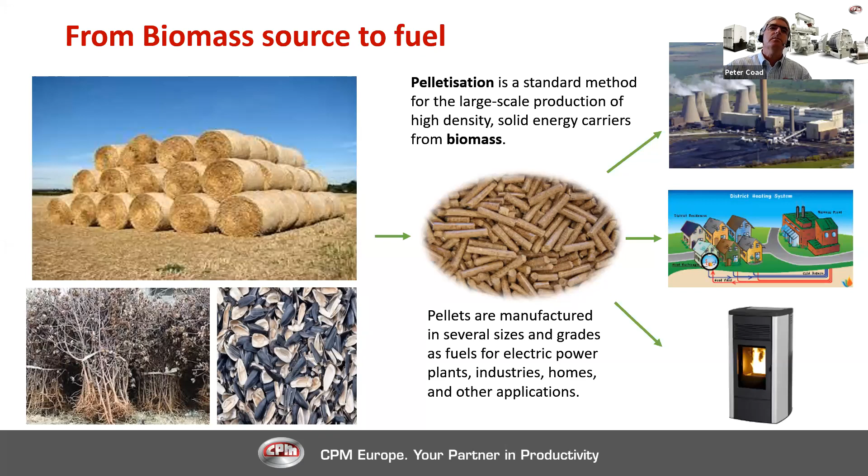Pelletization is a standard method for large-scale production of high-density solid energy carriers. Pellets are manufactured in several sizes and grades as fuels for electric power plants, industrial power plants, homes, and other applications, as we've seen already. There are two basic groups the pellets are made in: industrial standard and non-industrial or domestic standard. We'll more or less work through the industrial today.

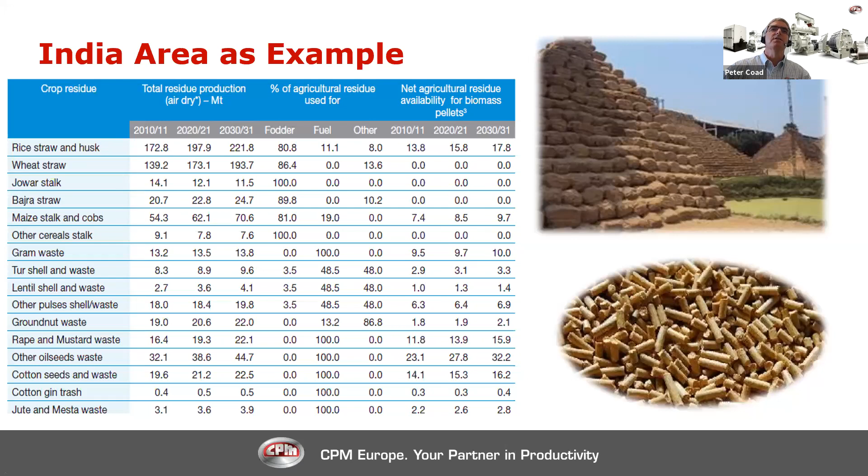If I take India as an example, there's a vast array of different raw materials available and vast tonnages. In fact, if you added all these up, you have some 100 million tons of material readily available, if it was actually available to the market and there was infrastructure in place to use it. If I zone in a little closer on some of the more readily available units, there are quite some similarities and differences between them. The moisture can vary between 8 or 10 and up to 55%. The particle size of these materials is quite different.

Some are bulky, voluminous, some are sticky, some are gritty, and all sorts of different things. And then you have moistures and ash contents, as everyone has discussed. So from very, very high ash contents when you compare to wood to reasonably low areas. And of course, bulk densities are also changing.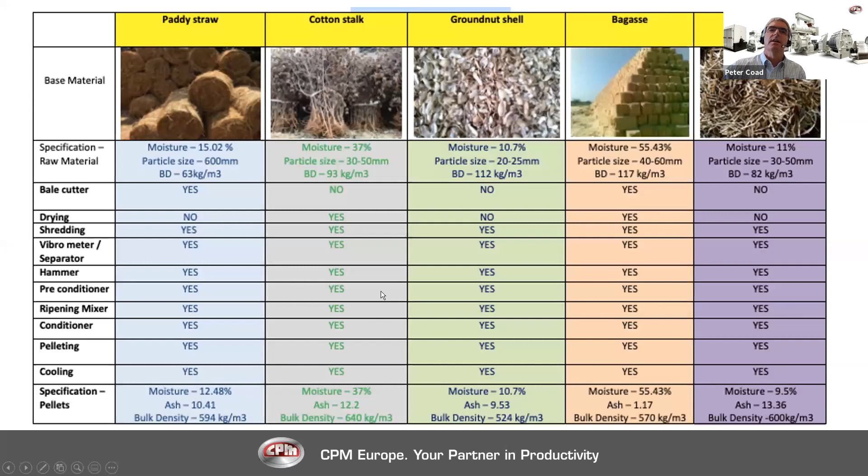Now, some of the influences of this raw material, yes, it depends on the region and the type of material coming in, the input form of that material, the age of the material, the moisture content of the material, and the ash content. And control of the incoming material is very important to any of these processes.

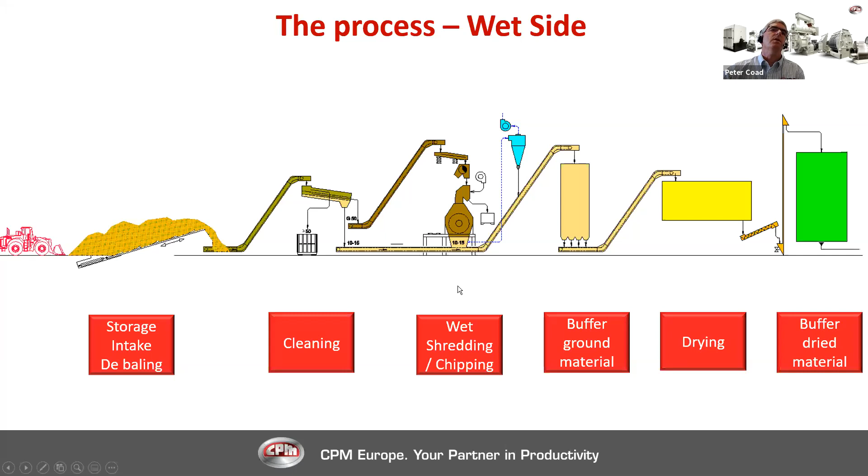If I split the plant line into two sections to make it easier for us to see, we can call the first section the wet side of the plant. And the material coming in, well, it needs to be stored. Then it needs to be cleaned. It needs to be shredded or ground. It needs to be maybe dried depending on the moisture. And to dry it, we need a buffer before and a buffer after. Just to go through these sections.

The raw material storage. A lot of these agri-waste residues, it's quite complex due to their short harvest season. And to get them out of the field into a place where you can use them, there's a very short window in many cases. And so infrastructure needs to be put in place if these farmers are to stop burning, to get this material efficiently off the field into a storage facility where it can be stacked or covered and kept in a reasonable condition until it can be processed further.

Also, with different moistures or different qualities of material, they need to be segregated and held so that they can be blended later. Also, different species or types of material need to be segregated and brought through as a recipe or blend to be added together to make the final product.

This feeding can be manual with bales, as we see, as bulk material coming through, and within the plant itself, they can be manually, semi-automatically loading shovels, or with conveying systems, debaling systems. All of these things are in use.

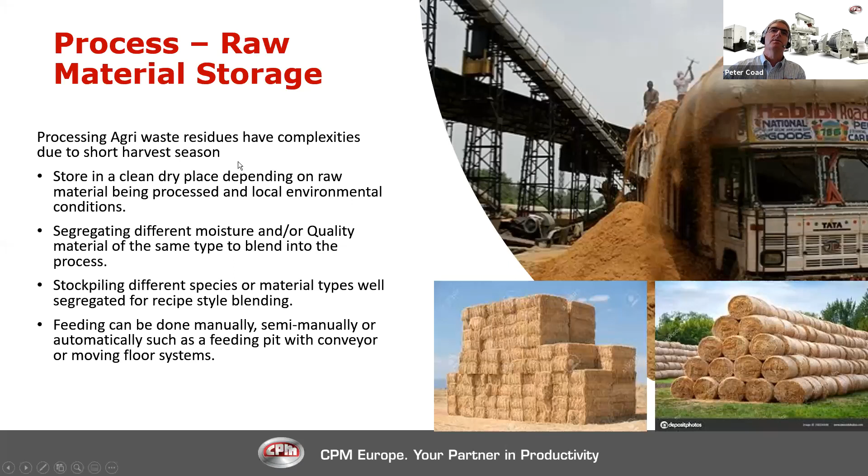The baled materials, as we saw from the other presentations, if they're used to bring the material and store it, well then to bring it through to process for a pellet, it needs to be debaled and then shredded. And there are various different types of machines on the market, such as bale shredders and tub grinders.

After the material has been taken into the plant, it also needs to be cleaned in some way to take out as much of the abrasive materials as possible, to remove rocks, grit, dirt, foreign materials such as metal that may have been picked up along the way, and also to try and reduce the ash content and the abrasive elements as much as possible. And this cleaning can be done by sieving, washing systems, and metal removers.

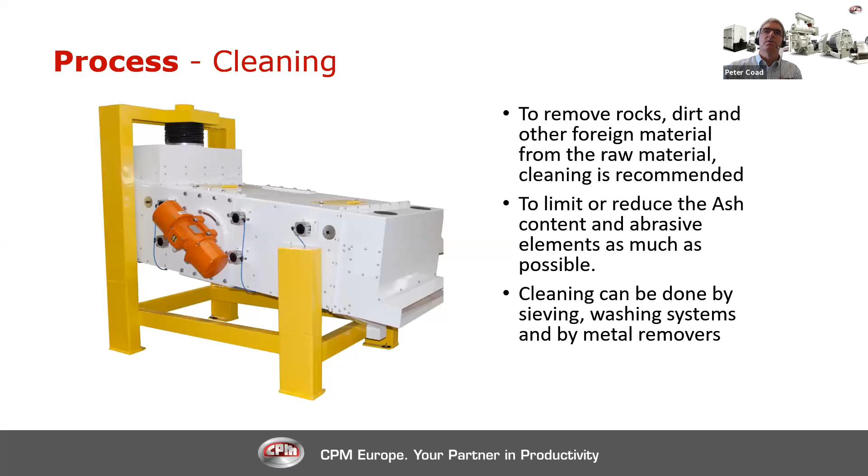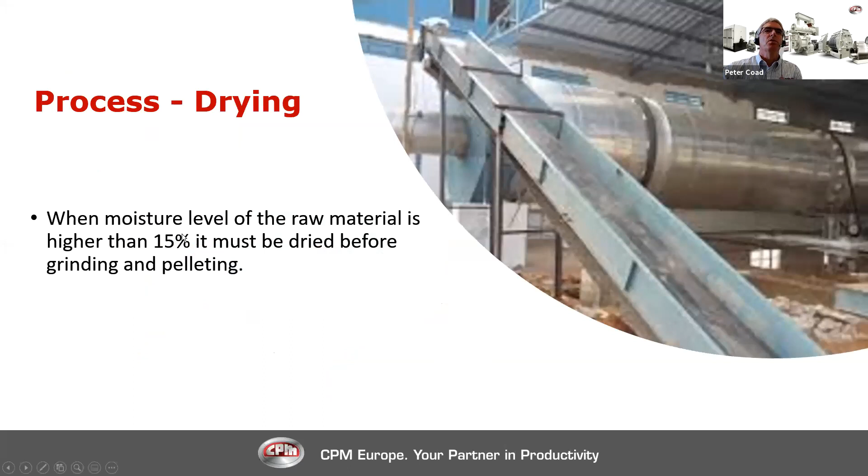If the material needs to be dried, and in most cases, if it's 15% or more, it will need to be dried before the pelleting. Then there are various different drying systems available, either drum dryers with high temperature systems or belt drying systems with lower heat input systems.

Moving on then to the dry side of the process. After the material comes from the dryer, it would normally be buffered to allow a split in the plant, so the pieces of the plant could run independently, but also to give the material time to stabilize after drying before it passes through to pelleting.

After it has come through the dryer section or the input section, it will most likely need to be further ground to get it down to a particle size that is useful for burning later. In this case, we would advocate a hammer mill grinder. And from the hammer mill grinder, the material would pass through a moisture control section and then through the pelleting, afterwards to cooling and sieving, and then outloading.

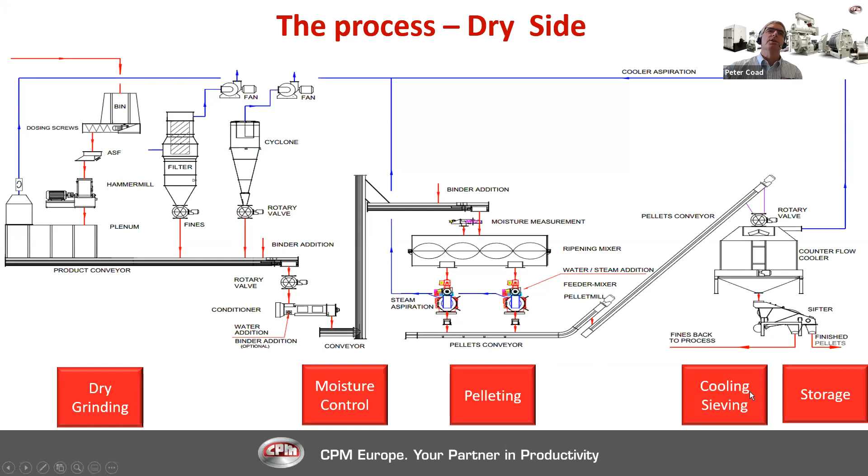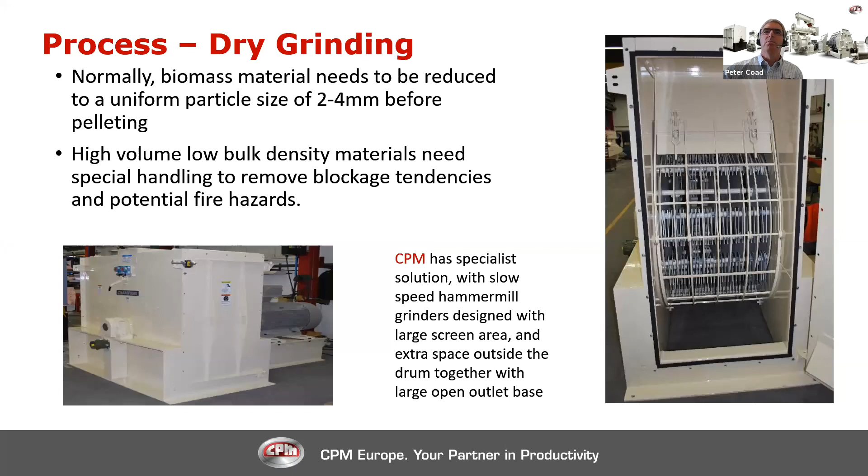The process of dry grinding can be difficult enough with these very high volume bulky materials, as Olaf alluded to earlier. From CPM's perspective, we have developed a slow speed hammer mill with very large screen area, plus a large casing around the unit to give extra space for the material to flow through and pass out through an open base. And this has proved very successful.

After the grinding, it's very important for pelleting that you get a homogeneous mix of raw material coming from the input side, but also after drying that the material is stable in its moisture level, so that you get a continuous flow through the pellet mill and a continuous quality of material.

So in that situation, we would advocate moisture measurement and water dosing with a control system, and after any moisture addition, that the material would have time to ripen or mix and stabilize before it's pelleted and then fed through to the pellet mill.

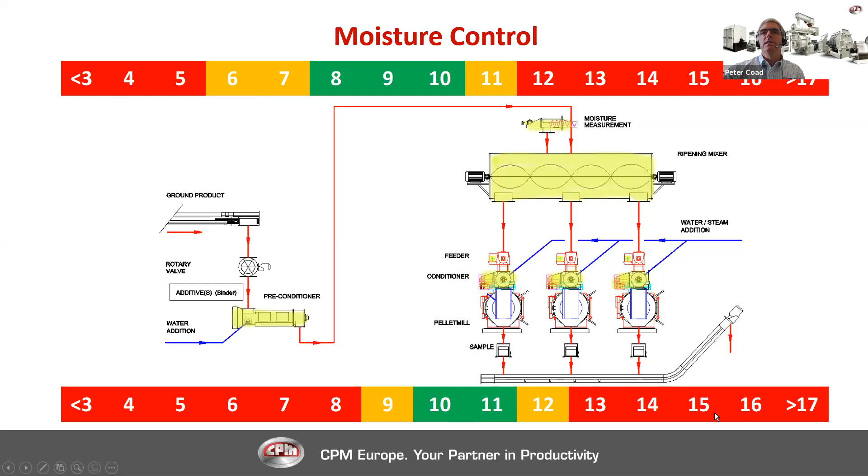From that situation, yes, you can pellet the material. The perfect setup is somewhere in the 8 to 10% region, but coming from a dryer, it may need to be a bit lower to try and stabilize the material coming through. So then we would add back some moisture and narrow our pelleting width to give us the best moisture to give the quality pellet. So bringing up a little bit of moisture in the system, bringing our average up to the 10-11% region. If it's much higher than the 15, then you see the pellets start to deteriorate.

A quick look at that then: if I look at 10%, this is straw pellet, but 10% moisture gives a really nice pellet in this situation. As the moisture increases, the bulk density starts to decrease. If you move up further to 14%, again, your bulk density is further falling and you're starting to see cracks in the pellets. And when we get to the very high moisture of 22%, our bulk density has nearly halved, and the pellets are very fragmented and won't stay together very well. So this gives a good indication that moisture control through to the pelleting is very important.

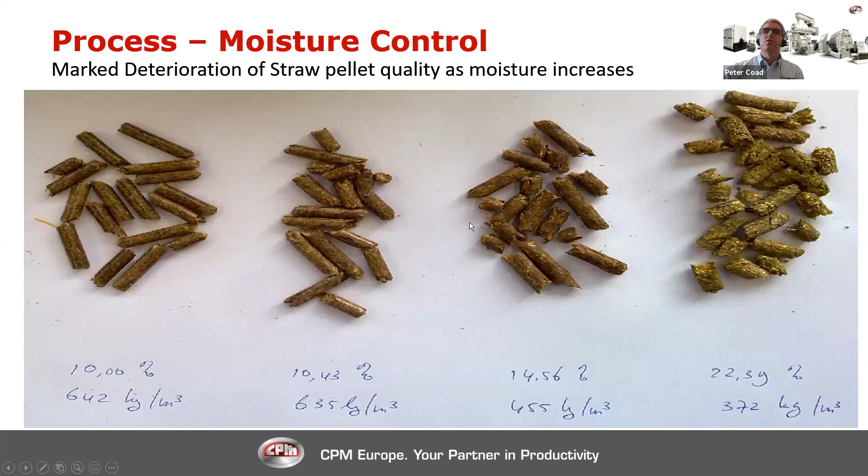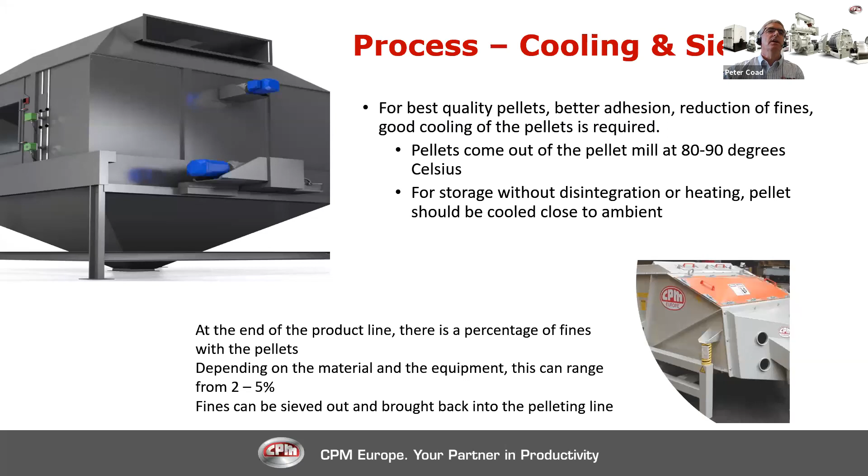And that brings us neatly along to the pelleting process itself. The CPM machine is a vertical ring die machine. It has been in the market for many, many years, a very robust machine. After the raw material has been processed through the blending, the grinding, the drying, then it is passed into the machine and pressed between the rollers and the die into a continuous production of consistent quality pellet. After pelleting, of course, there is the cooling process and some sieving of any fines off the material back into the line. And then you have, of course, packaging or loading, either bagging or bulk loading outside.

Some points to consider: it's quite difficult raw materials and so many different sources. So for the client wishing to pellet this, you really need to think about the raw material source and the suitable storage to get that raw material into the plant, because you want to run your plant up to 7,000-8,000 hours per year, running continuously to give you the best throughput and also the money back and the best profitability from your plant. So proper raw material processing through this plant should be tailored to that specific raw material to get the best quality from it.

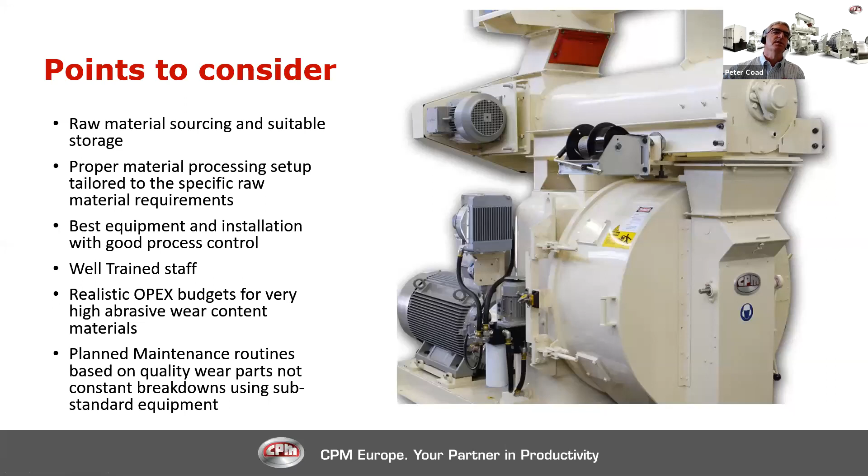Of course, purchasing the best equipment and installing it in a good line with very good process control is very important. Also, well-trained staff at the site, making sure they know how to optimize the machinery, keep the material flowing and do any maintenance. Because this material really has very high ash content, there is definitely higher wear through the line, not only in the pellet mill, but everywhere through the line from a wear and tear point of view. So realistic operational budgets for this higher abrasive material need to be taken into account. Also, planned maintenance routines based on quality wear parts, and not having constant breakdowns from using substandard equipment, will make your plant much more profitable in the end.

Just to finish up, CPM makes a large number of very robust pellet mills. These pellet mills are built to operate all day long in very tough conditions. And we have been in the biomass business for more than 30 years and have produced more than 600 pellet mills into that market. Our machine is a direct driven single reduction gearbox, no-nonsense design with good technology and such things as oil lubricated rollers to increase our lifetimes and bearings. We've also developed specialist dies and rollers for these high abrasive materials to reduce as much as possible the wear element to keep the machine running as long as possible for you as clients. Well, I hope that gave you a quick run through on how a biomass plant should look.

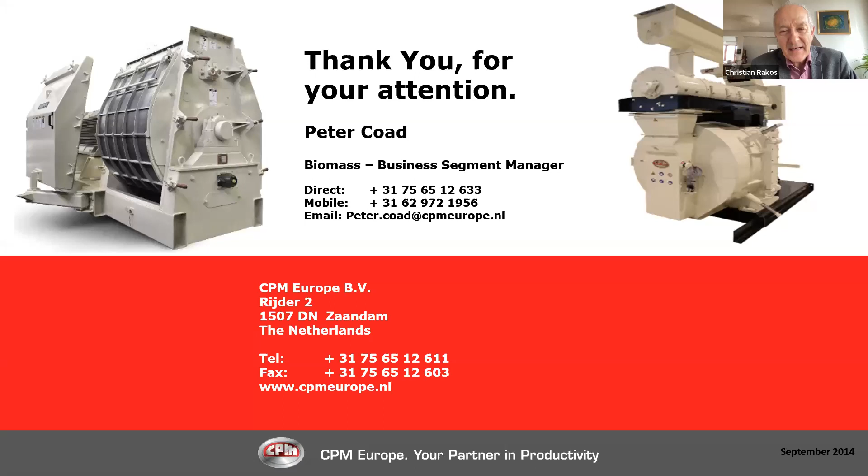This brings us almost to the end, and I would like to give the floor to Saku Rantanen. Saku, a board member of WBA, is running and building plants that use agricultural biomass as a fuel, and he will wrap up the discussion and draw some conclusions from what we have heard. Saku, the floor is yours.

Okay, thank you, Christian. So I'm actually very excited. We have heard a full presentation on leading companies in the world when it comes to biomass densification. So very pleased to have you all presenting here and sharing your knowledge on the densification.

I'm trying to add a little bit more flavor to the picture, perhaps taking a risk by comparing these different technologies from my personal perspective, and it is a perspective from Asian industrial use of biomass.

It doesn't apply, the same rules doesn't necessarily apply in Europe or more developed markets, but my view is more for agricultural biomass densification for Asian industrial use.

If we look at the four different options: first is pelleting, the second is briquetting, the third is baling, and the fourth I have introduced is non-densified biomass. These would be basically options if you are using biomass for industrial applications. I will share my view on each of these.